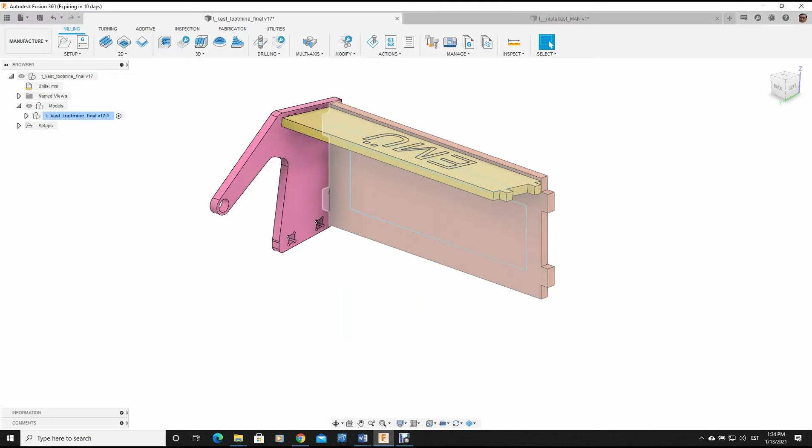To develop the machining or manufacturing technology for our toolbox, we will make a copy of our original design file. The intent here is to make a separate manufacturing file. We will bring in only part of our toolbox—only the parts or details we actually need to manufacture are brought in on purpose.

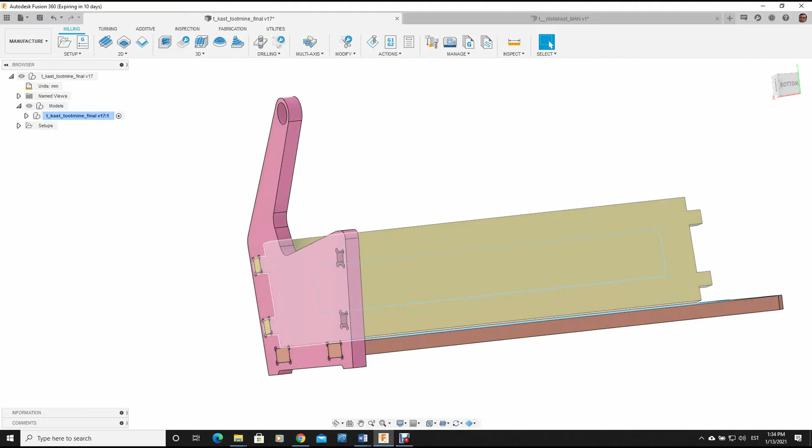And then we can start the CAM programming of these parts. As said in the reading text, we are going to utilize a 3-axis router to manufacture those parts out of plywood of thickness 18 millimeters. And for each and every part we need to generate a CAM setup together with different toolpaths that will machine our features. So let's start.

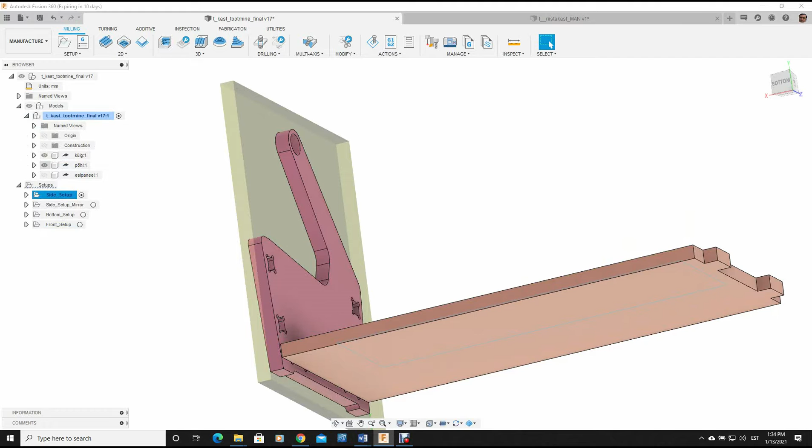At first we will start with manufacturing, showing the example of how to program the side. For the clarity of things I will hide others, and here is the general setup of our CAM programming for the side part.

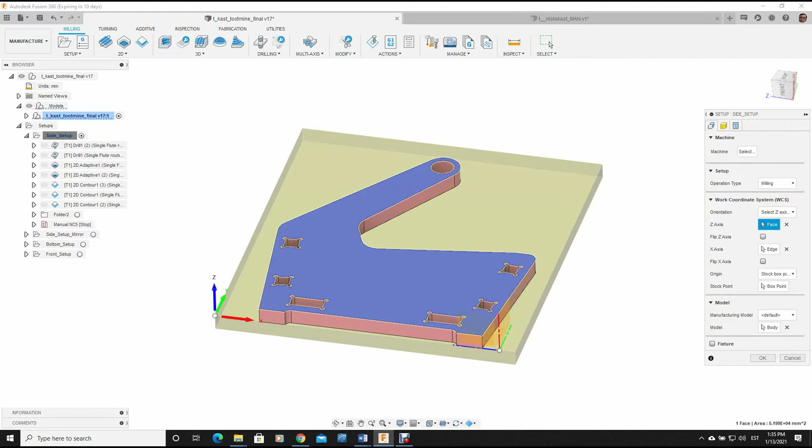In the setup we have defined our stock. That is to be argued whether the stock is of the most rational size or not. And also we have established our work coordinate system. This is established to the lower left corner of our stock in this instance.

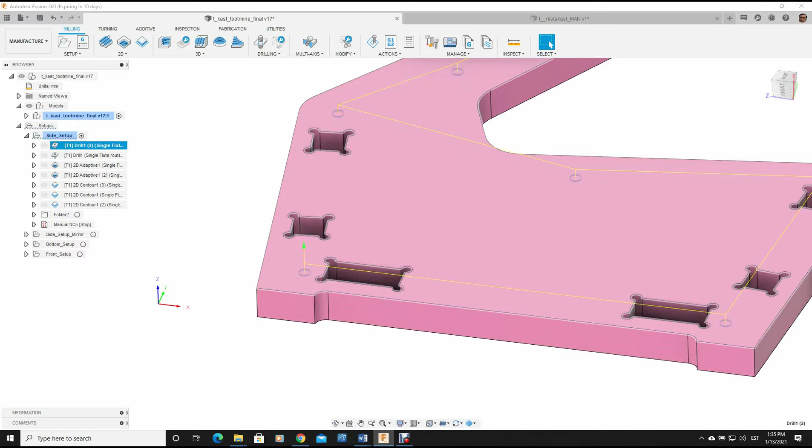Then we will have the toolpath. Originally here we have planned to have so-called technological holes—holes from where we will make spots, and then we can actually drill some screws in there so that they will hold the part firmly onto the CNC machine table.

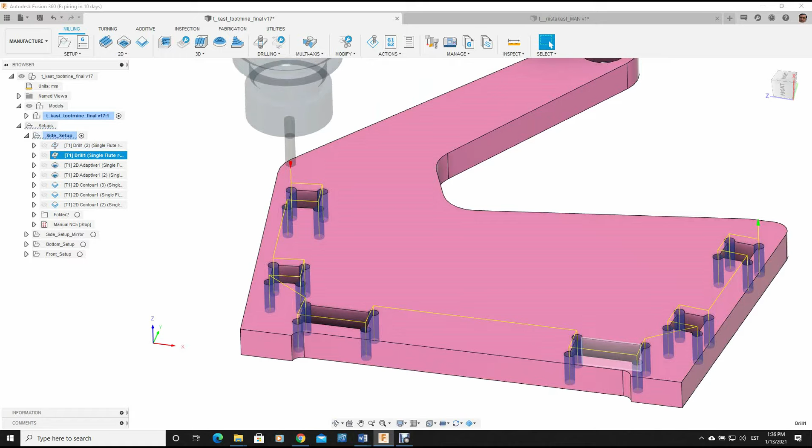The second operation would be to drill out the corner reliefs of these female connecting pockets. Then there will be the roughing operation of those pockets, the roughing operation of the pocket for the handle, which there will be some special features linked to this, which we will have a look on later.

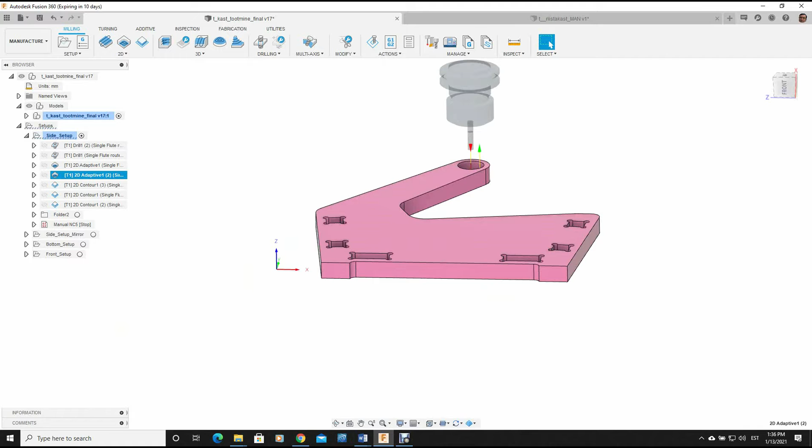The contour, the finishing operation here, and then there are the finishing operations on the mating pockets, and finally we will cut the part out from the stock.

First thing to mention, or something I forgot to mention at the beginning, we will machine those parts, details, one at a time, since these are the limitations set to us by the size of our working area on our routers, which is maximum 800 millimeters only in the Y direction. Otherwise, if one has a bigger router at his or her disposal, all these parts could in principle be manufactured from one big stock.

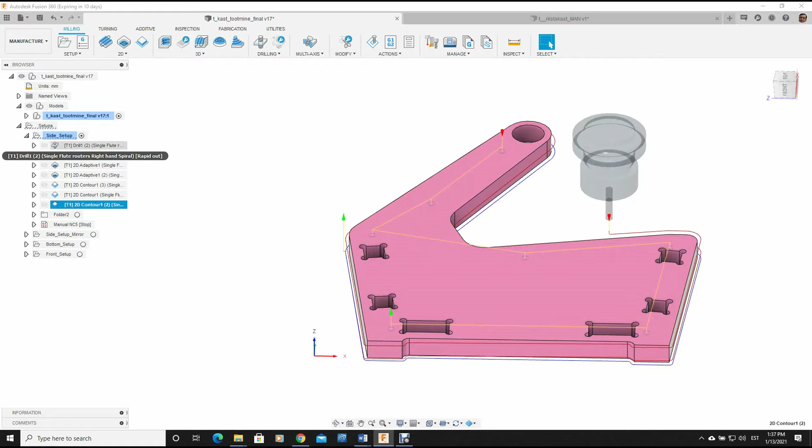Let's have a look on how to program a toolpath. Here we have the drill operation. Programming a toolpath in

the majority of CAM programs demands quite similar information. First you need to input information about the tool we are going to use. Then there are the cutting parameters, the spindle speed or surface speed, the feed rates. Then there is the chaining of the geometry. Here we are just doing small spots, so we have chosen some points.

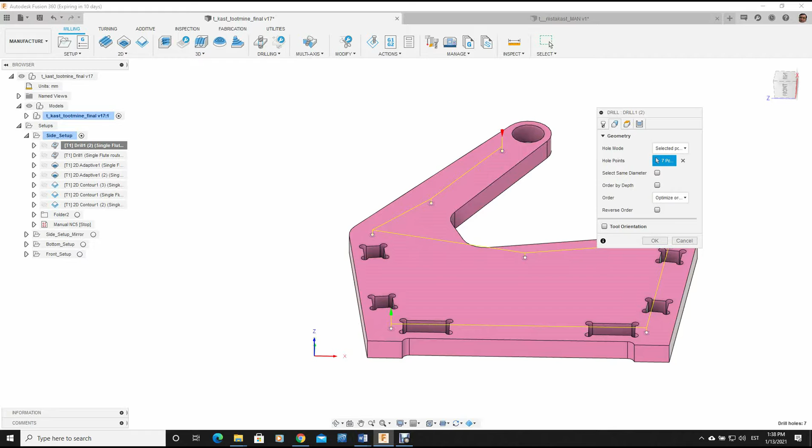This is to confine the cutting tool in the Z direction. We are setting the heights for our manufacturing machining process—where is the stock top, how deep we are going to machine and so on. And here we can set the type of the drilling operation.

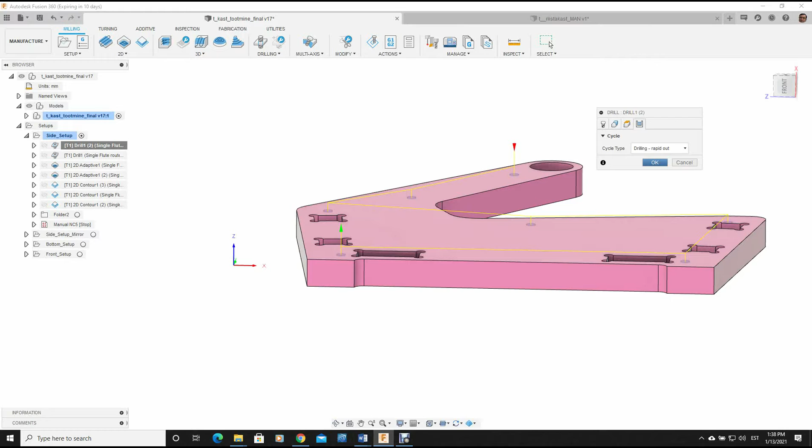This is a relatively simple operation, nothing much to talk about here. So let's have a look on the first toolpath, the simulation.

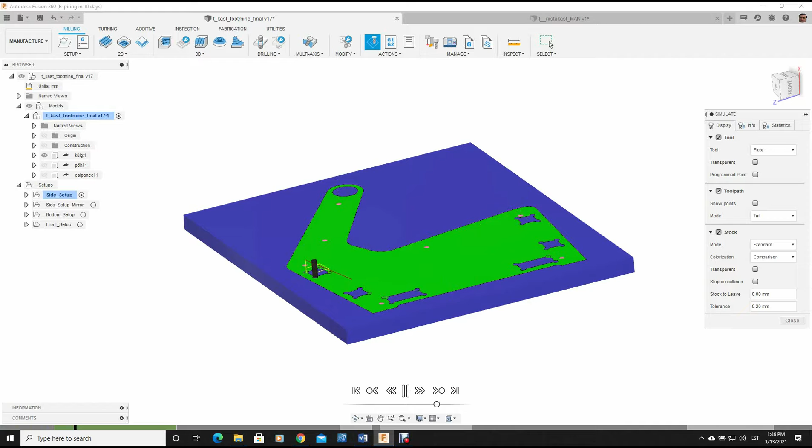This is now showing how it is drilling the spots, now doing the reliefs. We'll make it a little bit slower—drilling to the reliefs.

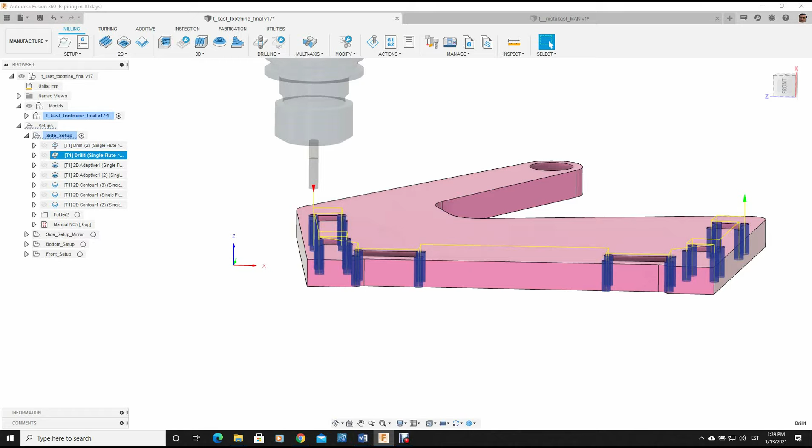Our routers are only able to use one tool. There is no tool changer, there is no tool rack, there is no carousel. So we have a 6 millimeter diameter router bit. It is a 1 flute end mill, and since plywood is not that hard, we are going to use that tool, the end mill, also for the drilling operation.

Here we are going to drill a little bit through the material, just to be sure that we have enough clearance.

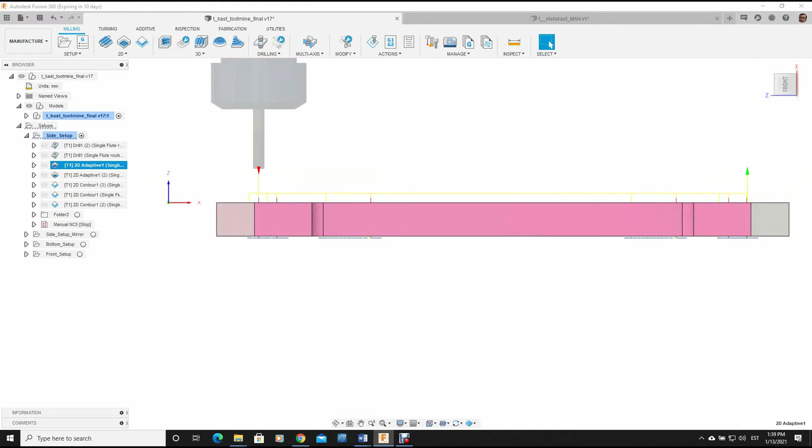Adaptive is the most common roughing toolpath. When it comes to roughing, we have another crucial parameter to pay attention to. That would be the load, meaning the radial depth of cut, AE, so to say. Again, machining wood, it is not that critical actually.

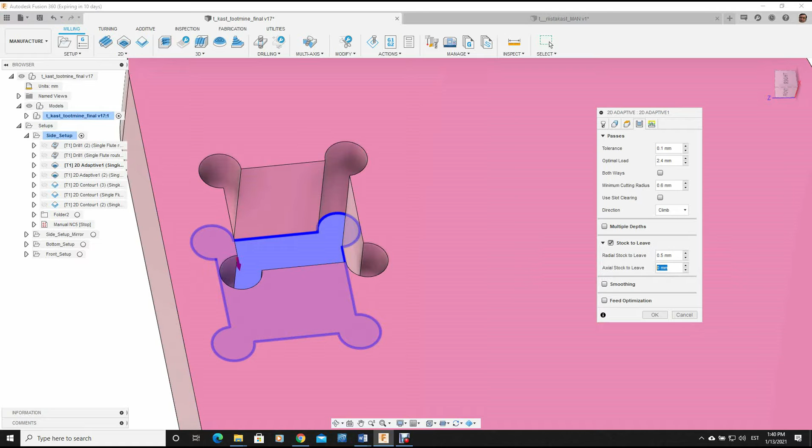We are going to leave some stock on the sides, on the walls only. No need to leave any stock on the Z. And we will enter the material with a plunge move. This is another adaptive for this. Another adaptive for clearing out the pocket for the handle.

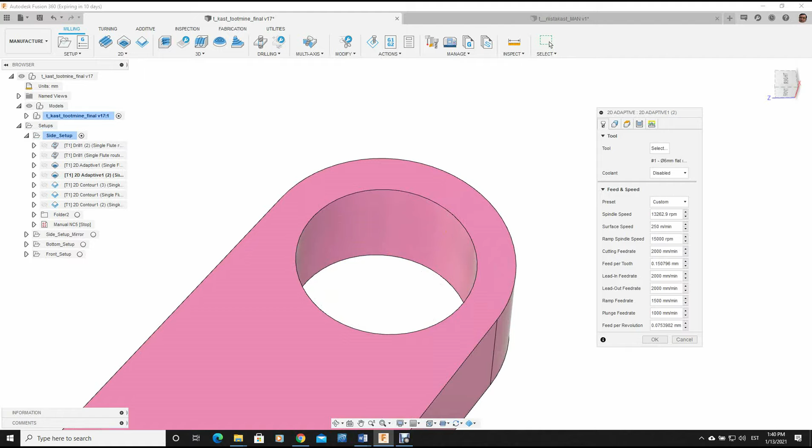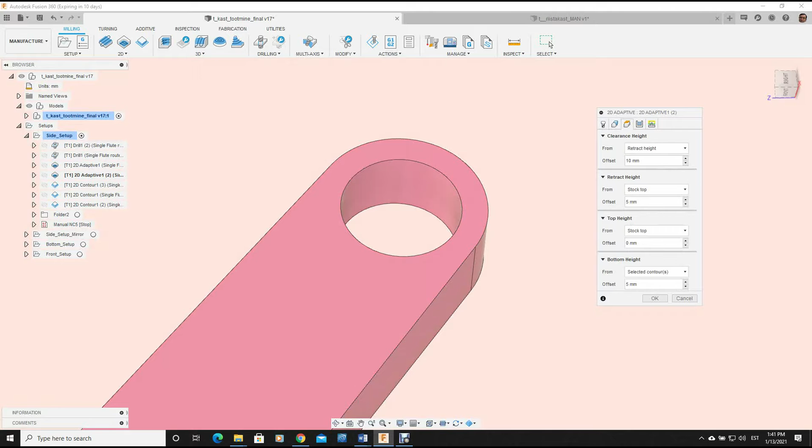Here we have used a trick, a shortcut. Since our plan is to make separate sides, meaning that we will have a left side and we will have a right side, then we can't actually machine through the hole. We need to leave some material on the bottom, and this can be achieved by leaving a positive offset at the bottom over there. This will be simplified. This we can see much better while doing the simulation.

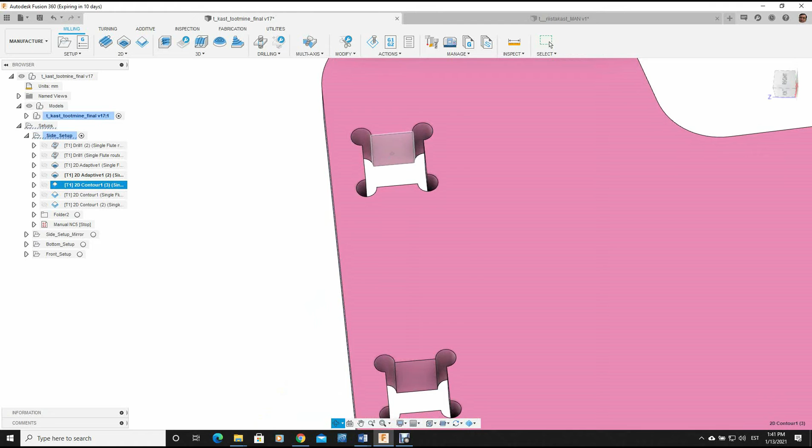Another very crucial thing is now with the finishing operations. Since we need to check the fits over here, we would like to be able to control the diameter of the tool from the controller. The difference here being, the adaptive takes the diameter of the tool from the tool library. Here it is 6 millimeters, and it calculates the toolpath following that 6 millimeters.

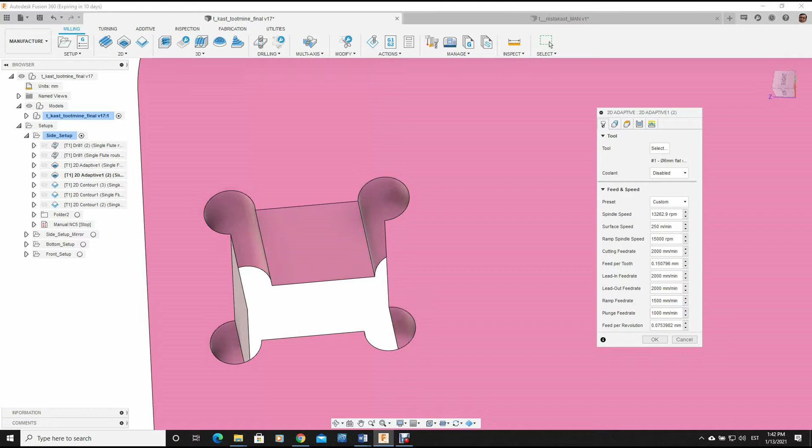When doing the contour, there is another option. This is a finishing toolpath. Here you see we can choose between different types of compensation. While using in computer, it means that it will stick with 6 millimeters, nothing much we can do about it at the control with a CNC program.

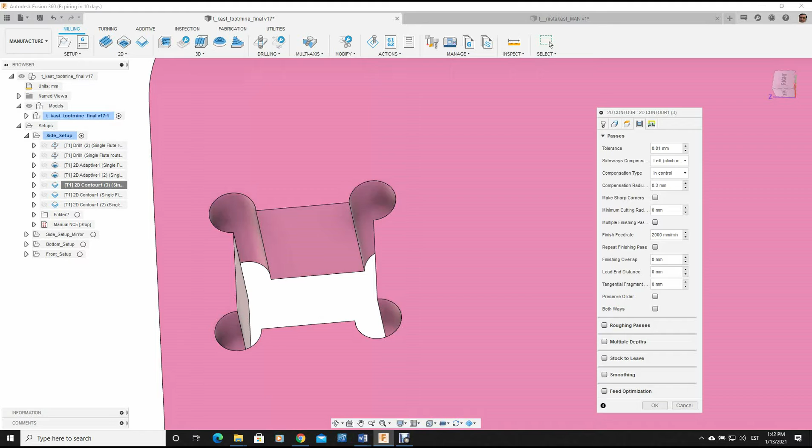One of the most common ways to utilize the possibility at the control is to use the option in control. In control allows us to use the wear parameter at the offset table at the machine control. So this is how we have established it here also. The same with these mating pockets.

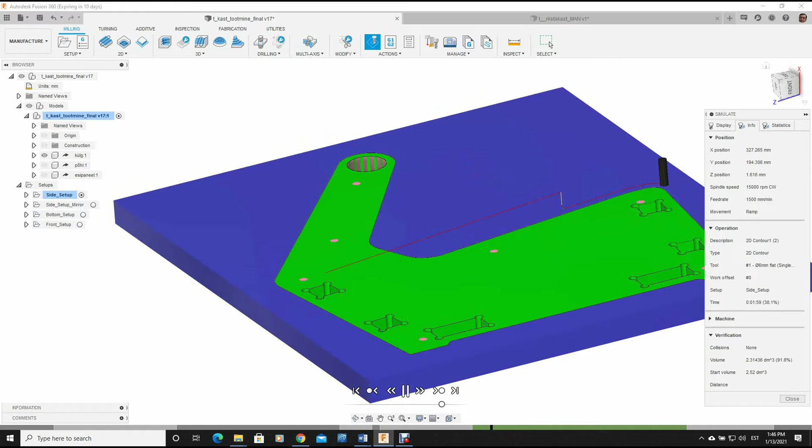The next operation you see was clearing that pocket. Now it starts to clear. Here is always an option. We can have a look at the coordinates, the crucial one being Z. So as you can see, the -19, we are going -1 millimeter through the bottom of the model, just to be sure that it cuts through.

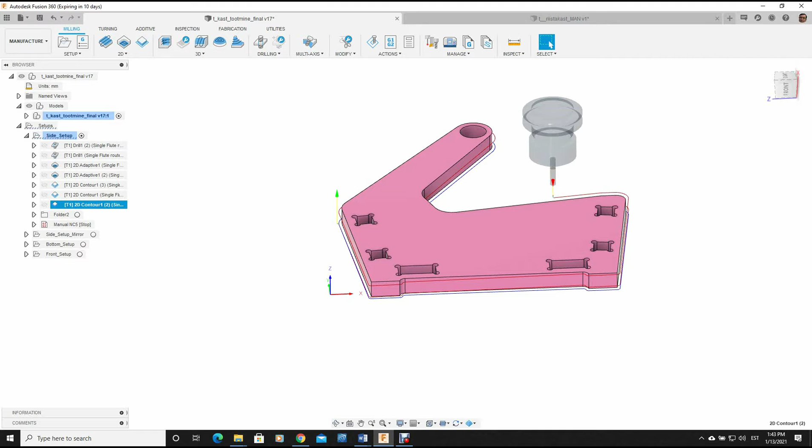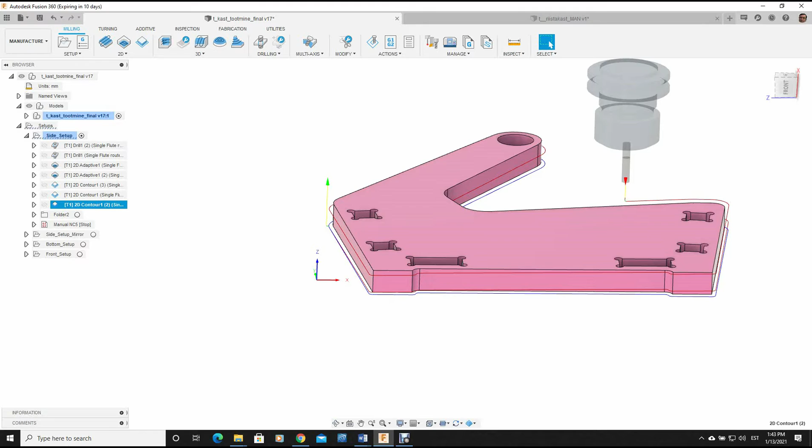Finally, we will ramp out the contour. Ramping out means the tool is simultaneously moving in all three axes. As it passes in Y and X, it is also slowly ramping down at Z. There are different parameters of this toolpath one can control, like the angle of the ramp, like whether or not you would like to have a finishing toolpath at the end, and so on. So this is our principal CAM setup and toolpath for the side.

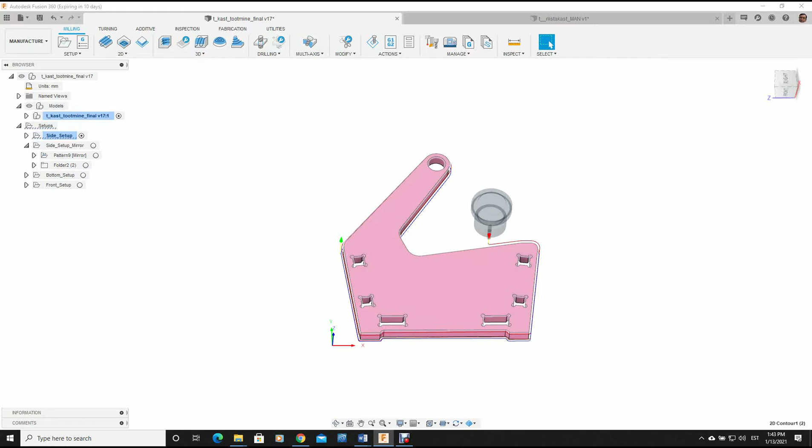Another trick we are going to use is for manufacturing the other side. Let's say if this is to be our left side, then to machine the right side, we can utilize the toolpath patterning option. Very convenient. No need for the actual model either. What we are doing here is mirroring the toolpath or the setup that made the left side.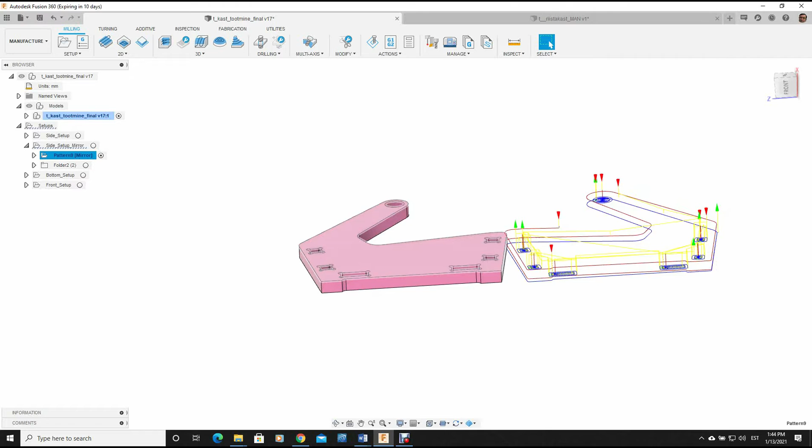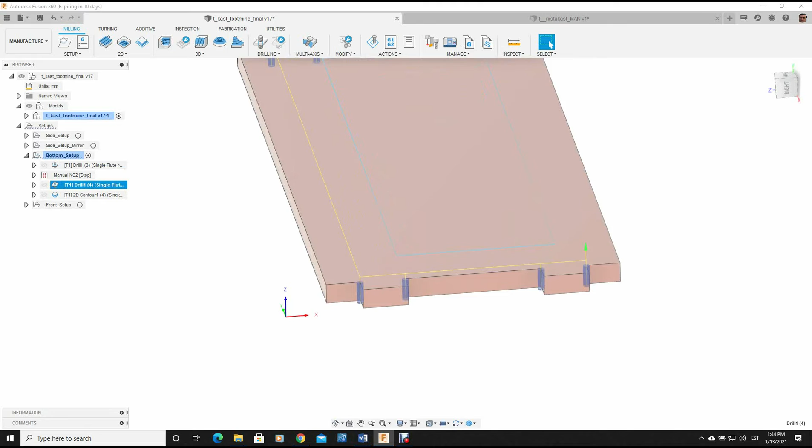For the bottom setup, nothing much special over there. It is a different size of billet or stock. Here we won't have so many toolpaths. Again, these are the optional holes to use as markers for the screws, so that the final part will be firmly attached to the working table. Again, there will be the drilling of the reliefs and then cutting out the part with a contour toolpath.

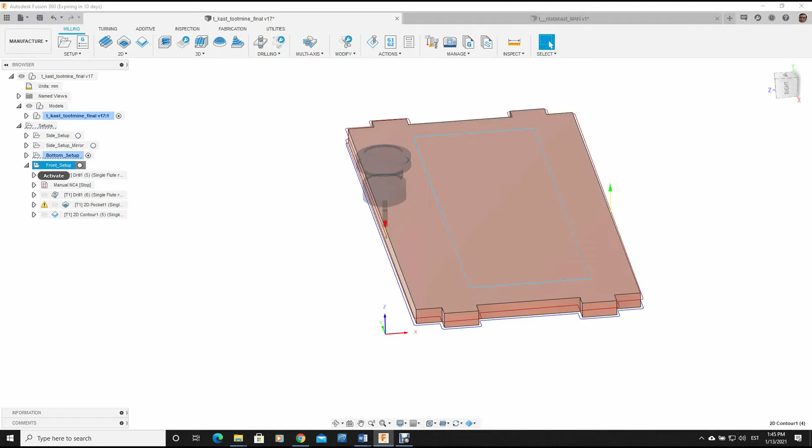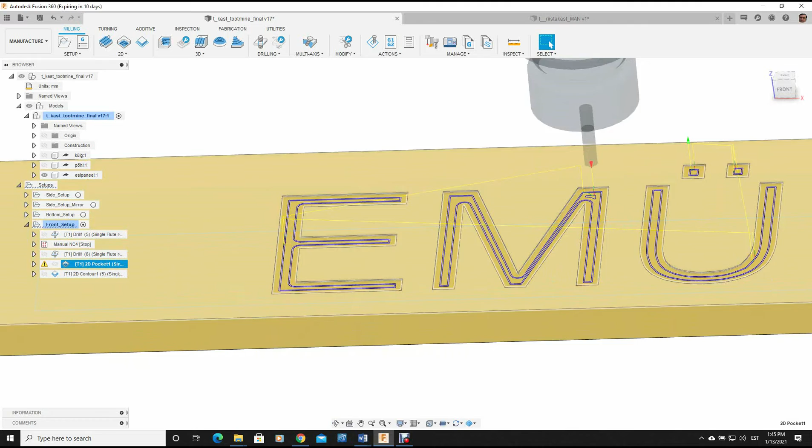Very similar would be the toolpath for the front. Here you can see we have made an addition to our model. We have actually modeled in the acronym of the university, Estonian University of Life Sciences, and we also utilized the pocket toolpath to cut it out as a carving or alike.